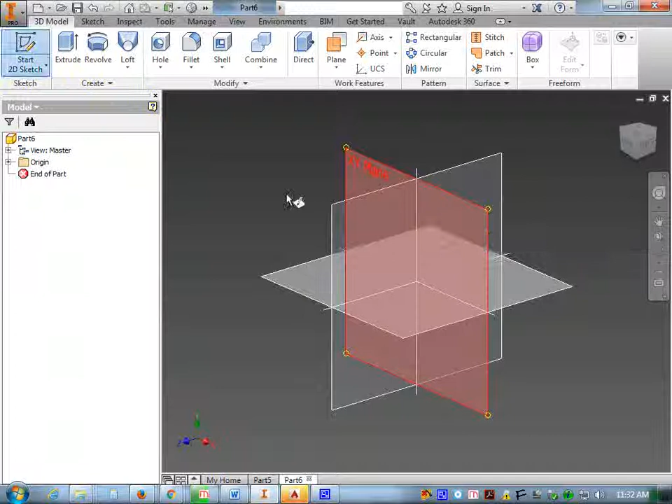So the first thing we want to do is create this triangle. The best way to make the triangle is, of course, I'm going to start a sketch. And I'm going to make a polygon.

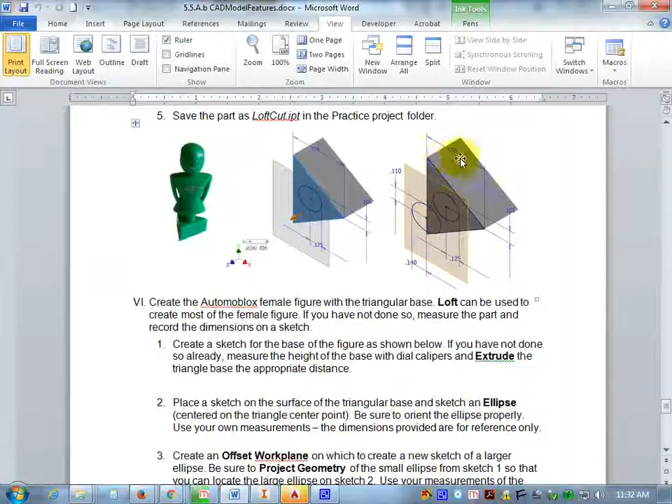Before I make the polygon, I have to create a circle. So I'll click on that arrow below there if the circle's not up, because I've got different ones. I'm going to make a circle, and I want to make this circle... I'm going to make it 5.56, so, or 0.556.

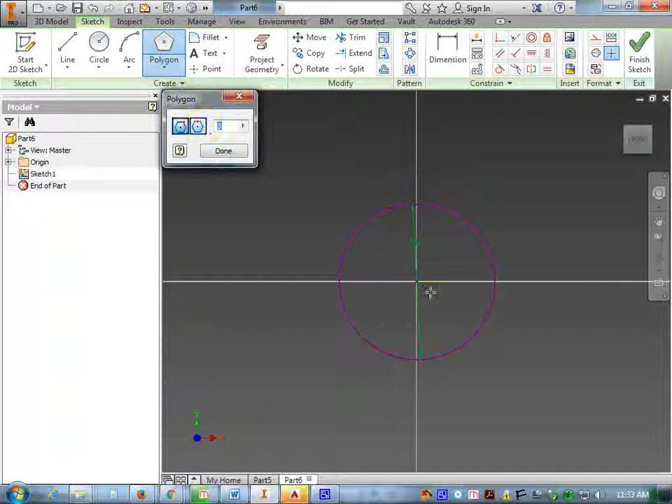There's a circle. Now I do a polygon, which is in this one - if it's rectangle at the time, you click the arrow down here, go down to polygon, and now I'm going to do a 3-sided polygon, and I want it inscribed because I want it inside the circle, because I want the length of my side of my triangle to be 0.556. So I'm going to click the center point there, and come to the outside edge there. There we go, that's the triangle I want to use.

Now I'm going to finish that sketch and extrude it. Again, I'm not concerned about what you extrude at - we're just going to make it. So I click the profile there.

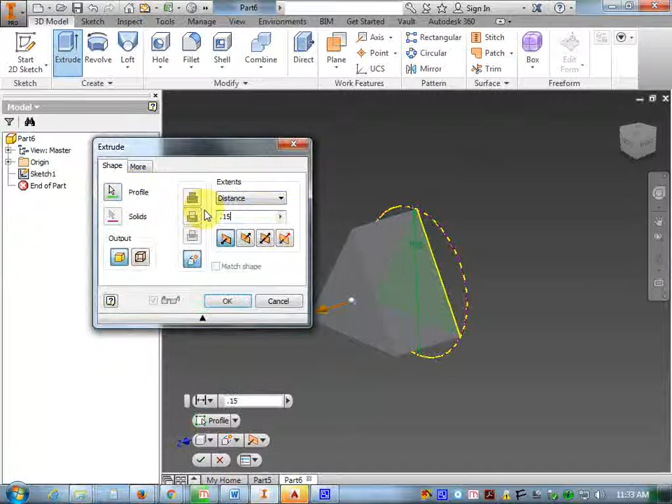We're going to do 0.3. No, let's go smaller than that - 0.15, that seems pretty good there. Again, you would measure this and make sure it's correct. With these assignments, we're not working on perfection in terms of the dimensioning and stuff, because you're going to be dimensioning your Automoblox cars anyhow. So right now we're just starting with that.

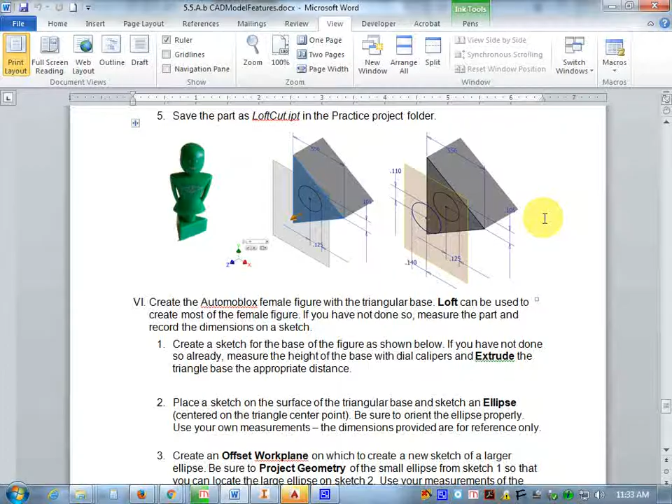So the next step I've got to do is make this here. Basically, if you look at this, what we're going to do is make this bottom part coming up, and I'm going to put an ellipse down there. So I'm going to create a sketch on this surface, and create my ellipse from the center point.

Again, I'm not real concerned about how big it is and so forth - it looks like that looks good. I might do a dimension. So if I want to do a dimension, I would do a dimension this way here. Does it say what size to make that one? That's this outside one here - that ellipse is that size there, that size there. So I think that's probably pretty good.

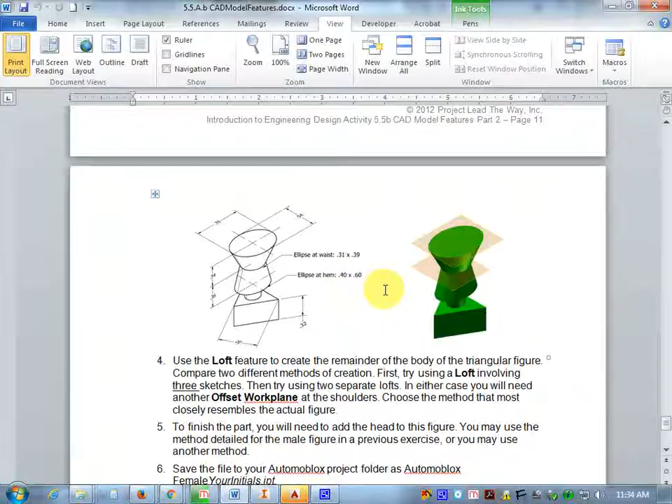So we'll go to... what's it, point... I don't know, let's go 0.1, and then we'll do point 0.1 there, and then I'll go 0.07 here. Okay, there we go, that looks pretty good.

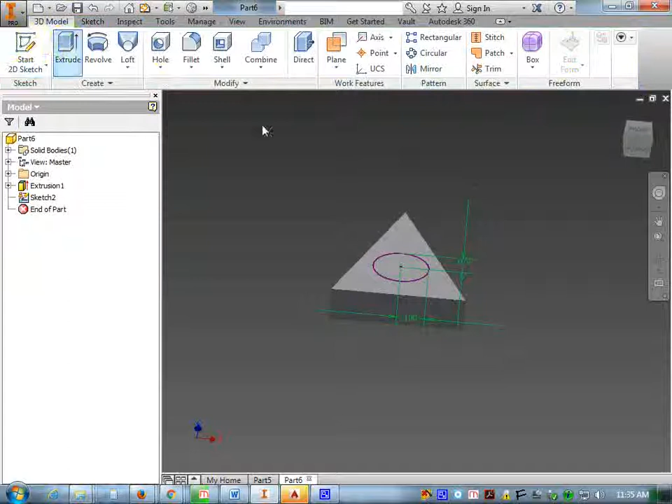Extrude that, have it go up, whatever - 0.3 seems good to me. Let's go a little bit less than this, let's go 0.2.

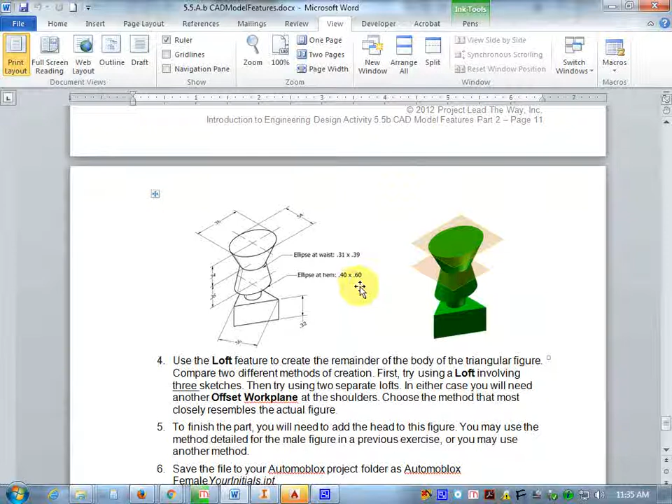Okay, now my next step is to create this bottom part. I'm going to create a sketch on this surface, using the same one I have, made bigger, and put another ellipse in the center.

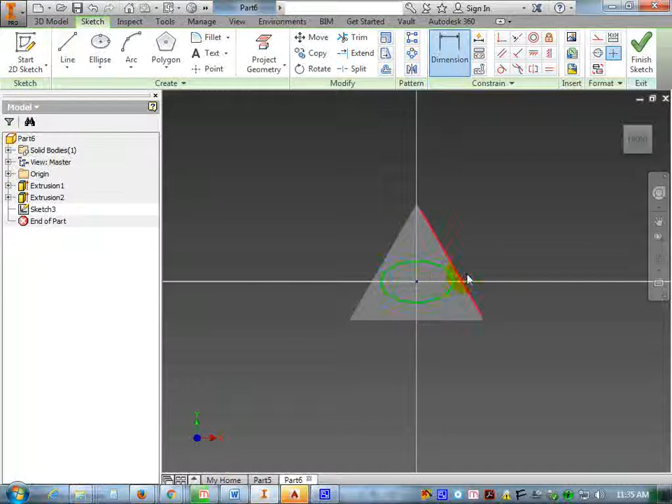I'm going to dimension this, the vertical part is 0.4 by 0.6, so the vertical is going to be 0.4, and 0.6 here. You'll notice it's a lot bigger, and that's fine because it's supposed to be bigger than that. You can see how that part's bigger.

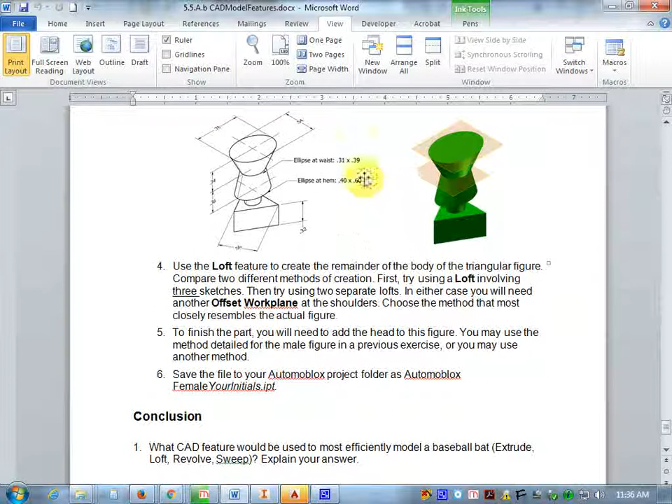Now this is the part I've got to think about. I've got to create a work plane that's 0.36 up from that. So I'm going to go work plane here, this surface up, 0.36, hit OK, and that's where I'm going to create my next sketch on this surface.

Since it's going to go big to small, I want to go to 0.31, 0.39 for my ellipse. I'm going to create an ellipse for the center point and dimension it, not concerned about what it is right now. It's going to be 0.31 - the skinny part's going to be 0.31, and the larger part's going to be 0.39.

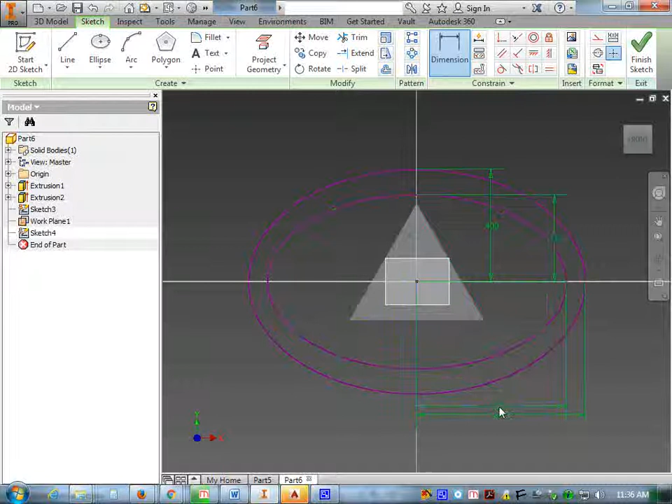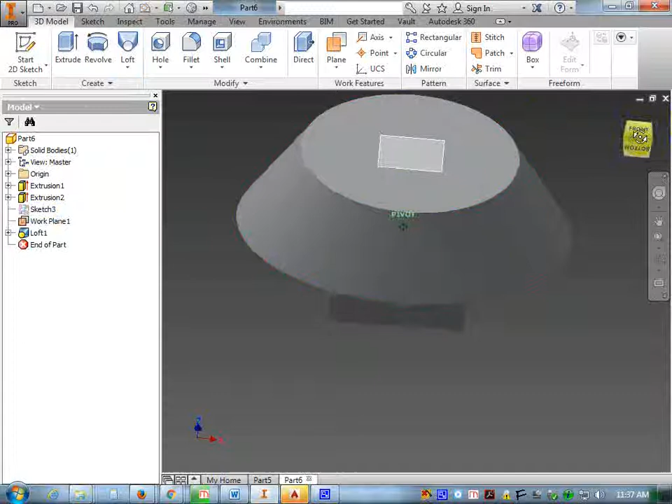Hit OK, and now this is where I'm going to do another loft. I'm going to create a loft from this sketch, click in this area to start the next one I want to go to that part there. There it is, I hit OK. And there's the next part of the bottom part.

Now I'm going to go again from this point, starting from that part. So create a new sketch on this surface, and I'm just going to project this geometry because I'm going to start at that size and go back out so it's bigger, to this size. So that sketch is done - all I did was project the geometry of this part.

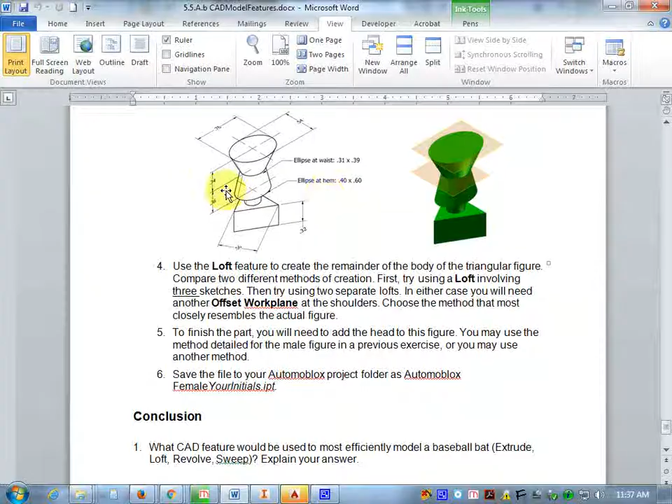So we're done there. Now how far is this, 0.34 up? I'm going to create another work plane from this surface up. What did it say it was? 0.34, so we're going to go 0.34 up, and create a sketch on that surface.

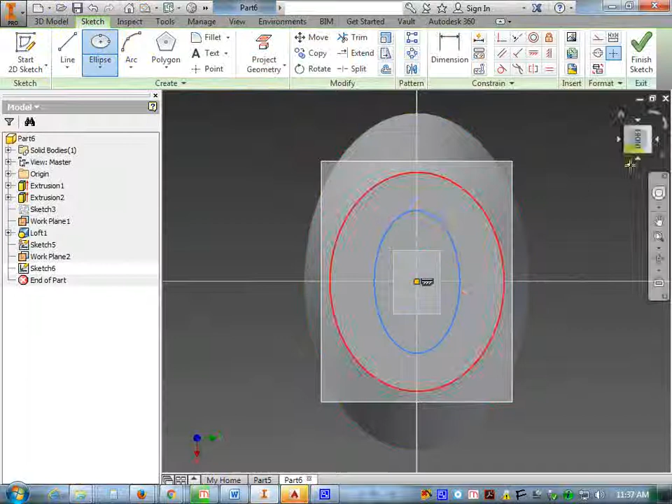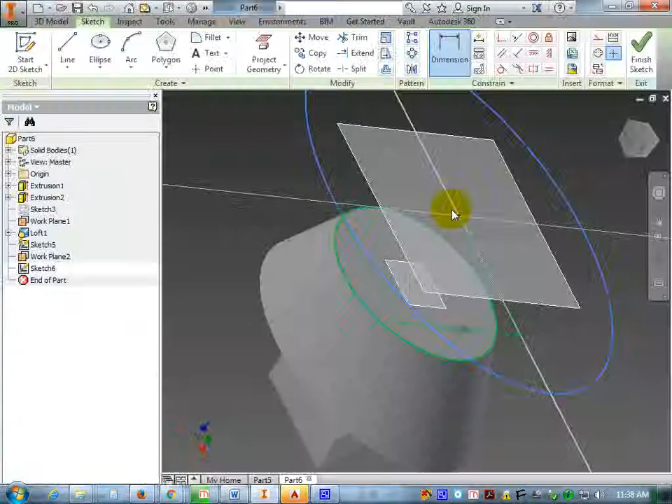And I'm going to make another ellipse. Yeah, I want to go that way. So dimensioning, this part's going to be the narrow part, which is 0.54. And the outside part's 0.76. It looks like we should have probably divided them in half, but I'm not worried about that - again, it's about learning this. So 0.76, we'll just say this one is here.

0.76, finish. Create a loft from this sketch, click in here to go to this sketch, make sure it's highlighted - good, it is. Hit OK, and there's the part there.

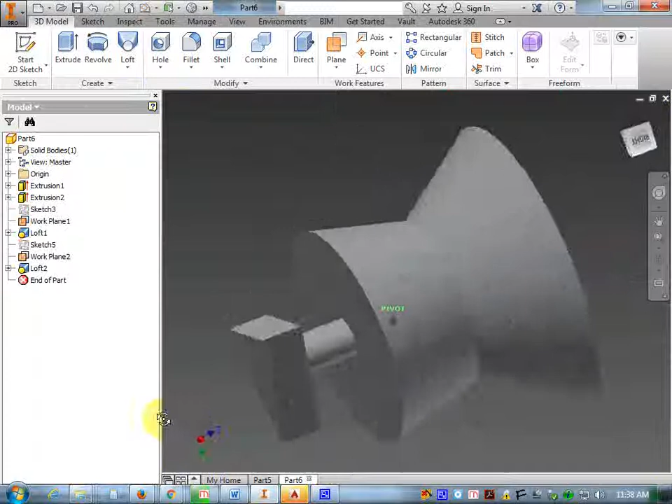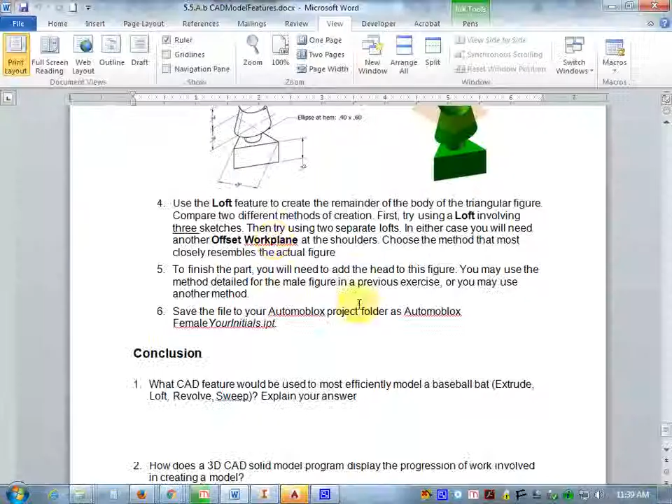Now it's probably about twice as big as it should be, but that's fine - again, it's learning the loft tool. Then you can finish with that head, just like you did the last one. Put a head on there and so forth, a neck if you want, to make it look better. You can split these in half, so instead of being 0.4, it could be 0.2 or 0.3. That looks like probably more of what it's like, but again, it's giving the idea of the loft tool. And that's the loft tool.